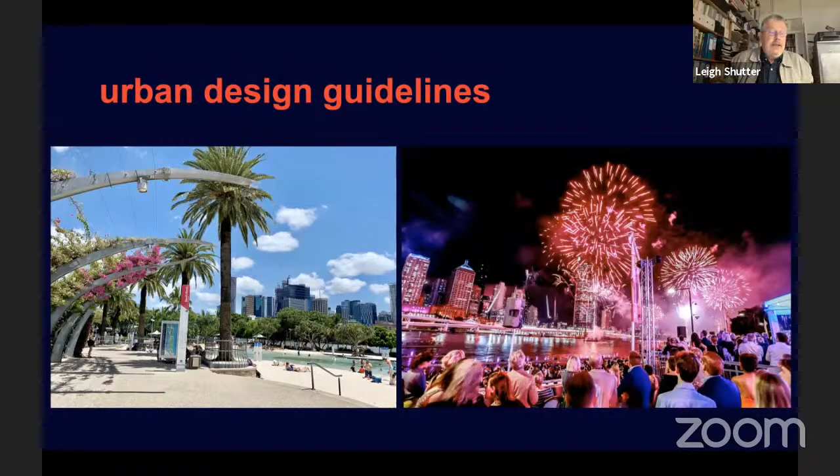So in Australia, we only have guidelines for urban design. They're not mandatory. They're simply ways that people might start to contemplate urban design. There's a range of guidelines we have: national guidelines, and state guidelines, and we can look at these in a little more detail.

I won't dwell on these too long, but Australian government agencies come together, and the Australian government, through its various bodies and institutions, has an overall guideline about the quality of our environment called Creating Places for People. This is quite an old document now, related to infrastructure needs, created by these government agencies and departments. In addition, each state typically has its own set of urban design guidelines.

They're all quite similar in a way, though of different ages, and primarily they're about the values that are important to us in our built environment.

As well as state by state, there are also non-government bodies, national institutions, foundations, alliances and councils that have various guidelines for urban design in Australia. The Planning Institute of Australia, in conjunction with the Australian Local Government Association and other bodies, has created Healthy Spaces and Places. The Heart Foundation has a guideline on creating healthy neighbourhoods, and the Council of Australian Governments has criteria for capital cities in terms of its guidelines.

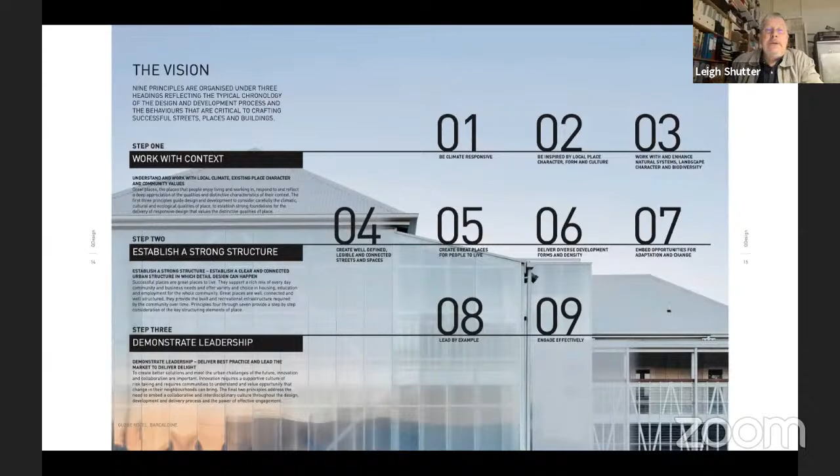Finally, in the last of the vision areas, to demonstrate leadership, lead by example and engage effectively. One of the really important things with a lot of our public design these days is engaging with the community, getting a community response and community input to projects. The last of these shows how one of these types of vision elements is illustrated.

This was vision element number 3, about working with and enhancing natural systems, landscape character and biodiversity. That in itself breaks down into a series of ways you might achieve that — number 1 on the right-hand side is working with established ecological and hydrological systems, and so on. This is fairly typical of the type of guidelines you'll find across Australia.

In Queensland particularly, there's a really strong focus on exterior environments because of the nature of our benign climate and response to climate. So physical context is incredibly important in our vision statements, at least, though that isn't necessarily always reflected in the design outcomes. This is where the issue between design policy and design vision come into conflict, with the potential to actually realise the outcomes you desire — and looking at the players involved, the financing, and the political framework has a real impact on this issue.

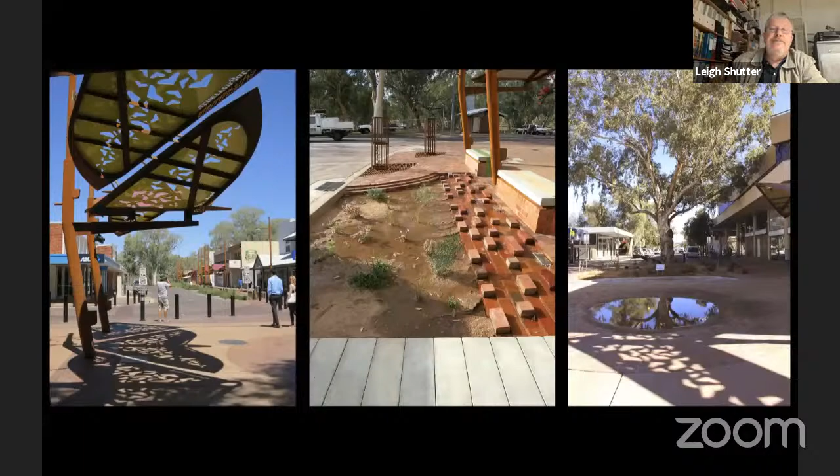And these are detailed elements from those moth shade structures you can see here. You can see the structures have different qualities in different locations. They have seating underneath and a variety of elements like that. This was at the opening of the new mall.

On the right, in addition to the shade structures and new paving, patterns, and landscaping through the area, there was new seating. The seating in the foreground is shaped like a caterpillar laid down on its side, crawling along the ground. There's a really nice element too. Here's another view of the shade structures through the mall area.

I think that's a really great example of where identity has been considered and successfully integrated into an element of urban design in a significant public space in the city. In the case of Alice Springs in particular, there's a very large Indigenous community, so being able to engage with and represent that community through these new public urban design works is an extraordinary result.

This second project is in Perth, designed by a national firm, Lyons, and a local Western Australian practice of architects, Iredale Pedersen Hook, with the landscape component contributed by Aspect Studios. I've got a video here that runs about 4 minutes talking about the development and nature of this project.

Yagan Square really connects the city and brings together the many elements of WA with the stone and the concrete, all the while respecting that Indigenous culture. What's really beautiful about this project is the narrative of the local Aboriginal people, an Indigenous story, interwoven and interconnected into the site in a way that is very distinct and very apparent.

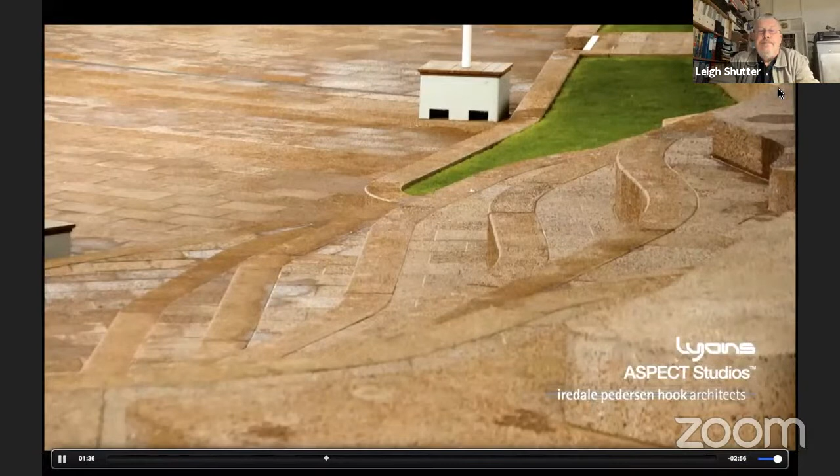This space has to operate at the larger civic scale, so we have large scale performances in this area. This can hold up to 2,000 people for large events and performances. But what's important is that it works at that scale, but it also works at the more intimate scale, so you get these little quieter moments throughout the project as well.

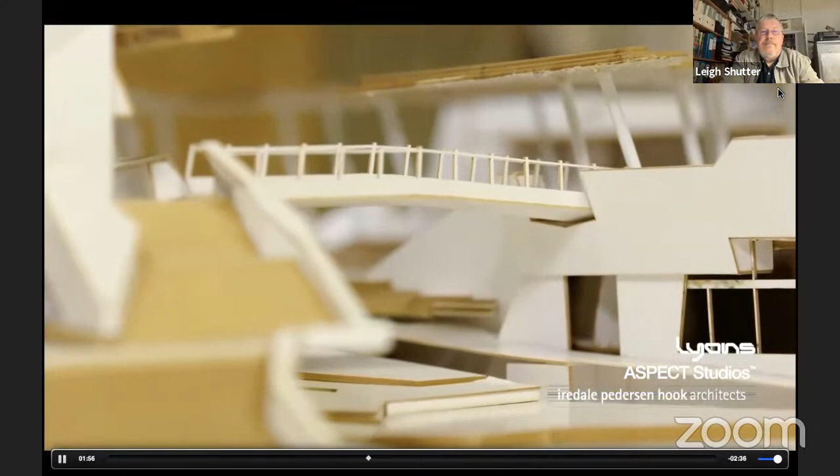We set out to design a really unique bit of landscape and architecture, and part of that started with taking all of those people that are thriving and now have access through between Northbridge and the city and from the rail, and trying to bring them into the middle of Yagan Square. So we talked about it as a heart.

A really important part of our design process was a collaboration between Lyons, Iredale Pedersen Hook and Aspect Studios, and that idea of an integrated landscape, art and architecture is really what makes Yagan Square so vital. I think a key part of that was the way we were working with the Whadjuk working group around understanding the complexities we could actually bring to this place.

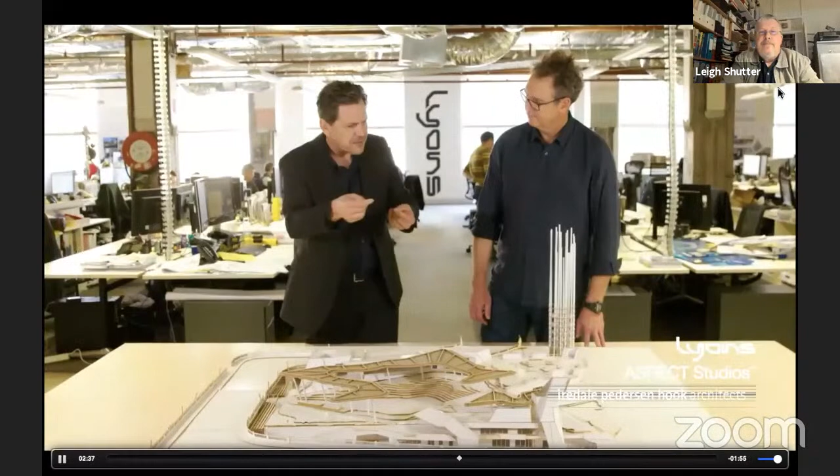It's about bringing these elements together in this constellation of pieces that sit in this place and start to make it what it is. I think as part of that, the integration of the art piece by local artist Jon Tarry really talks about a passage of water from this higher area, and it comes down the pathway, it reappears again, and then comes bubbling up here down the bottom.

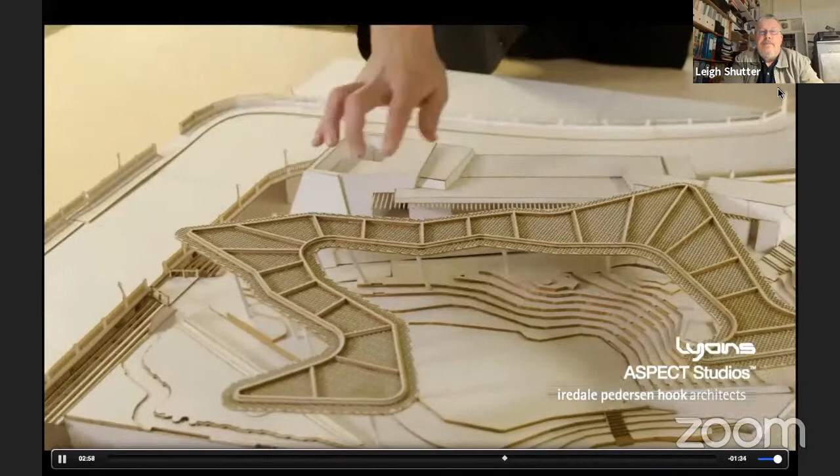The water source has been a big part of the Yagan Square story, and the importance of water to this particular area, knowing it was the wetlands many years ago before the development all happened in Perth. The canopy above us has a shape of the lake when you see the old map, so it's a big part of telling that story of this is what this place was.

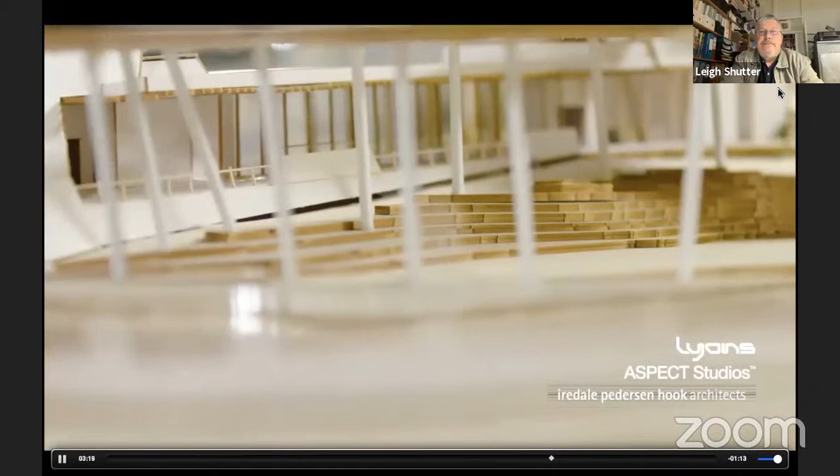The digital tower at the back replicates the reeds that are in the water. There were 14 of them that acknowledge the 14 Noongar clans inside of the Greater Noongar Nation.

Bringing that story back to be a pivotal part of Perth is really important. It's a pretty special place. I know when I brought my grandkids up here, they just loved it. My grandson's 5 and he goes, 'Nan, this is the most amazing place.' There's nothing like this that tells this story in our space, and Perth's been really fantastic to have this here, which is really a big part of we are here, you know, as Aboriginal people.

This is our country, acknowledging that through major development today. On the opening of this process, and the people involved said, 'Carol, they listened to us.'

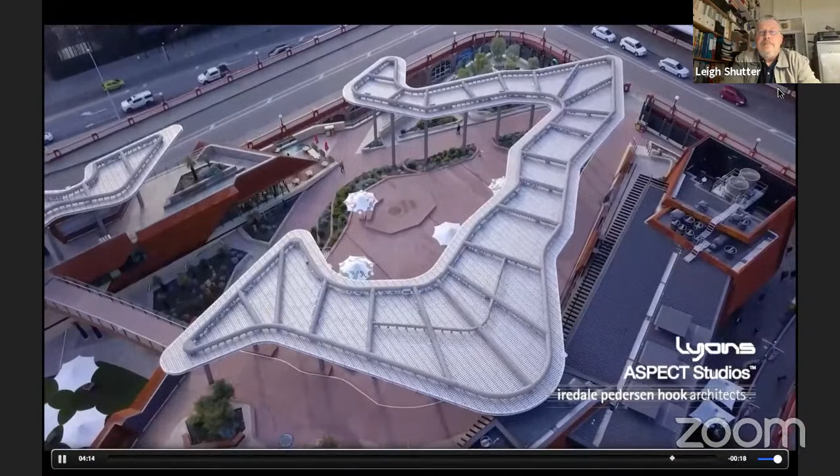Yes, this project is about establishing a new connection to the city and, of course, the remarkable technical feat to build this landscape on top of the 4 rail lines that stand below us. But what really stands out for me is the sincere collaborative process that the designers have introduced, working with the

Aboriginal people of this area to really bring their stories to life. So, I mean, there's a range of the designers there talking about the conceptual ideas for this place in Perth and the various people that contributed to it.

So if we look a little bit more carefully, you can start to see here how this zone sat in relation to the city. So on the right-hand side is the commercial heart of Perth, a city of about 1 million people. And on the left-hand side is the cultural precinct. And beyond that, though you can't see it, is a lake area.

But running through the middle where Yagan Square is, which is in the foreground here, is the main train line, the main access to the city. So the large rectangular building sitting immediately behind Yagan Square is Perth's Central Railway Station.

And one of the key important aspects was to be able to make, as they talked about in the video, this connection from the commercial to the cultural precinct. And that primarily happens down in the bottom. There's a continuous pedestrian plaza that runs from left to right, right to left, across the bottom of the square precinct. And in addition, there's new vehicular access to the train station.

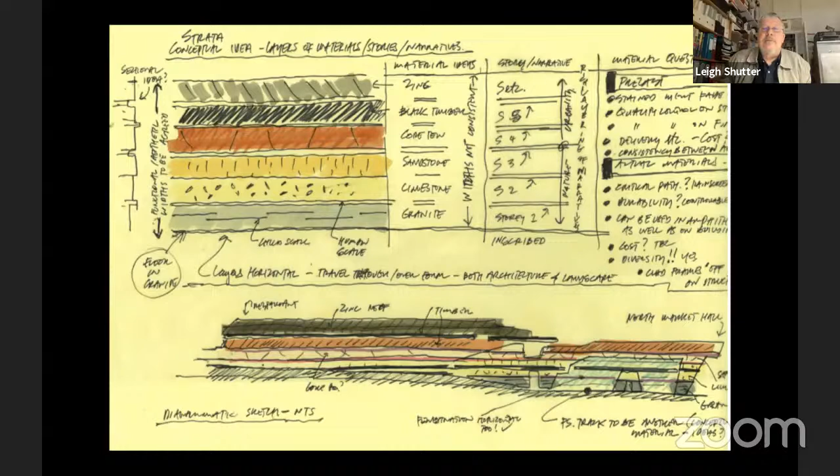Now, first of all, another one of the things that the designers looked at was the geomorphology of this place and these different layers and how they might be represented through different materials. And you can see that in this type of elevation, working up through the strata of the site.

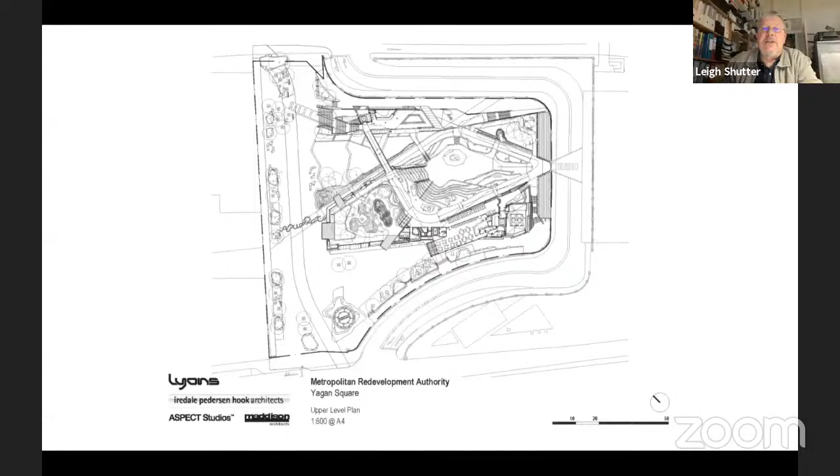primarily through all these things, making a connection over the train line which runs underneath. So the train station on the right here, you can see the vehicular access up to the train station, the primary elements in the square, and the pedestrian connection on the left-hand side from top to bottom, bottom to top, connecting those precincts over the top of

the train line. And as they said in the video, the shape of the canopy is in fact the shape of the original billabong, original lake that existed before this area was developed. There's some records of the original landscape and topography, and other elements also reflect those sorts of qualities.

Here in the bottom left, you can see the tower, which, as was said in the video, is made up of 14 vertical elements that metaphorically represent reeds in the water, but represent each of the Aboriginal communities that used and occupied this land historically.

So this is from the pedestrian walkway looking up through the square to the train station, which you can see sort of below the bridge across this end of the square.

Another view from that end of the square through the pedestrian link.

Looking at the canopy and water features, the canopy covers an outdoor performance space.

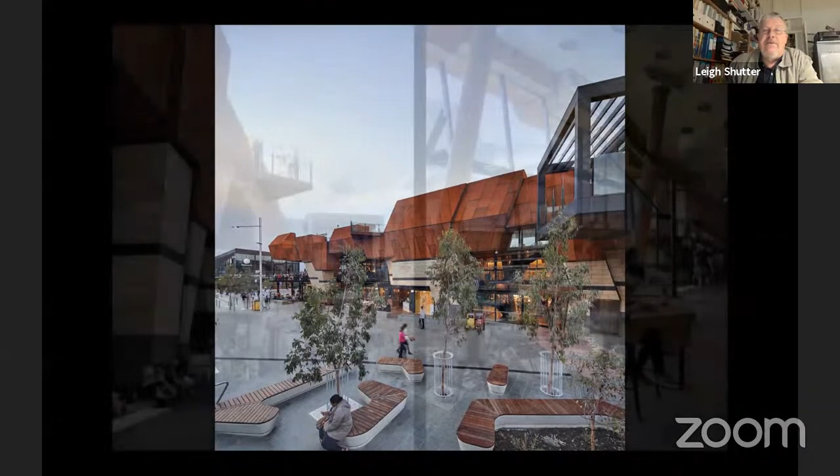Other views of the square, the vegetation still young. This is a fairly new project in Perth, with recreation, cafes and so on.

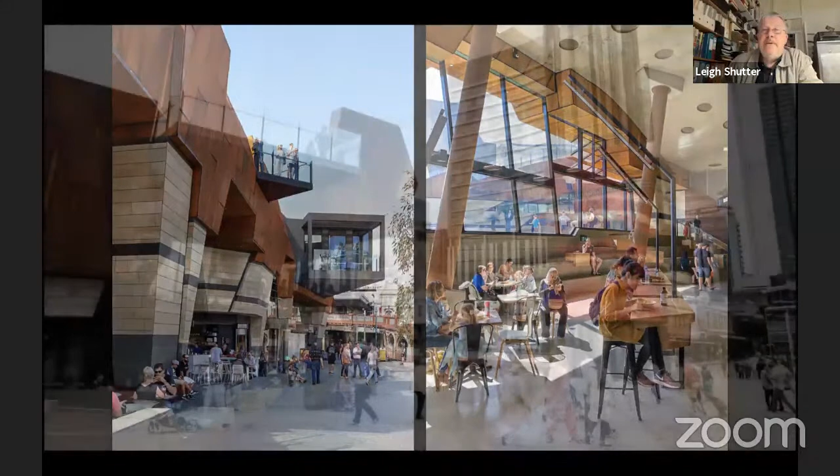On the right-hand side here is the lighting tower and the communication tower, the media tower with 14 reeds and the capacity to be lit and shown in different ways. One of the really interesting aspects of the space is this focus on lighting, using it as a sort of art and media piece in itself.

These are some views of the canopy over the amphitheatre space. I have another short video that looks at the concept and development of the lighting design, and shows the lighting design itself.

Just some last views of this water feature that runs through the site. These shallow ponds at the top of the site have water that runs down through the site to a lower area that kids can play in, but it also provides a respite from the surrounding traffic, with the sound of running water and so on.

I think both these projects, the Alice Springs Mall project and the Yagan Square project, are really two terrific projects where, in Australia, we're starting to respond to and recognise and engage with Indigenous culture, which has been very long overdue, not recognising the first Australians, not being respectful and attributing to them their rights and acknowledging the importance of their culture and how it can contribute to a contemporary circumstance and culture.

So on the one hand, I'm very encouraged by our changing attitude about identity, our changing circumstance in relation to Indigenous people and Indigenous culture. I think these are great examples.

Why these have been achieved, I think, is primarily because in these two circumstances, government has accepted its responsibilities in relation to design and policy. In both cases there has largely been an alignment between the vision, urban design policies and the outcomes. These things have been carried through successfully, and commercial interests or other narrower interests haven't prevailed.

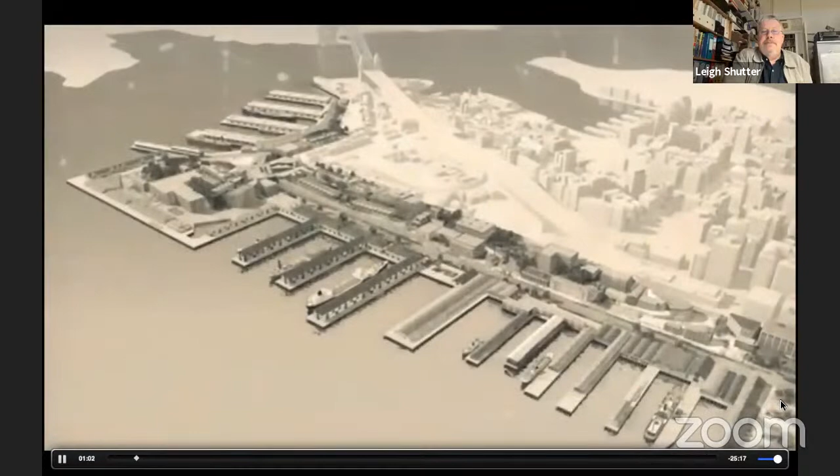I felt there was a once-in-two-century opportunity to take the former maritime industrial lands and link them up into, again, a recognisable group of headlands. The opportunity to turn this back into a living, vibrant, dynamic part of the city was something that couldn't be missed. There's nothing quite like it that's been done in Australia previously. Some of the international experts who've come here do say this is the number one urban renewal opportunity internationally. Almost a world first and a world only opportunity, and it is something you really want to take advantage of.

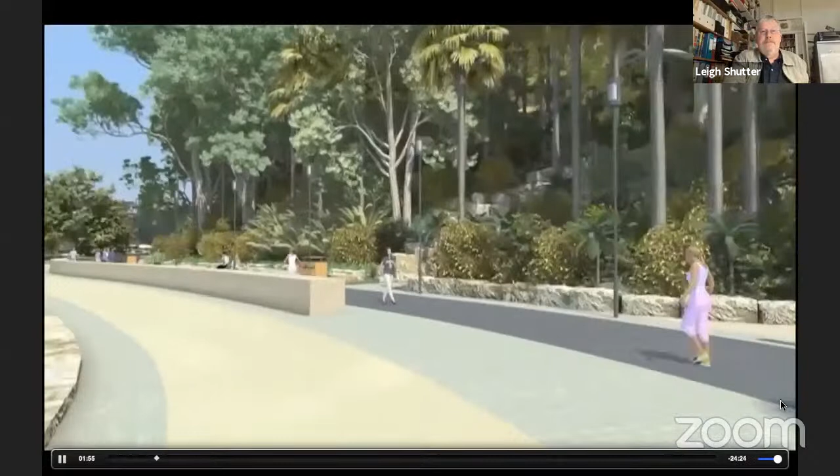This is the story of one of the most ambitious urban renewal projects in Australian history, transforming a 22-hectare former container port into a vital new dimension of this global city.

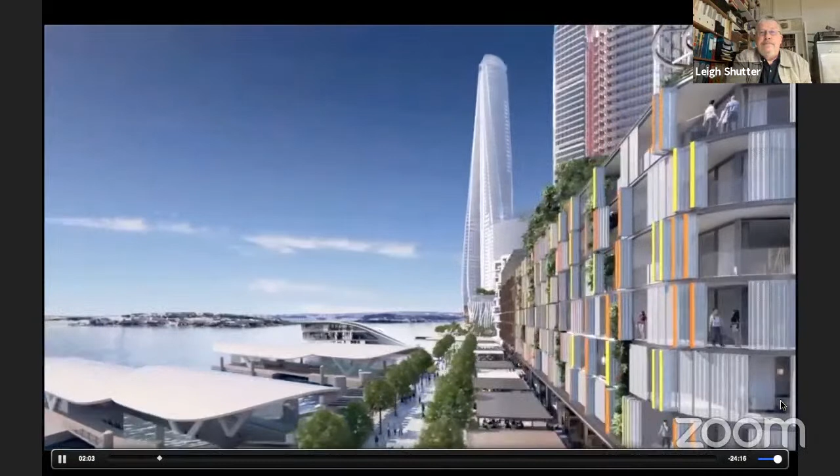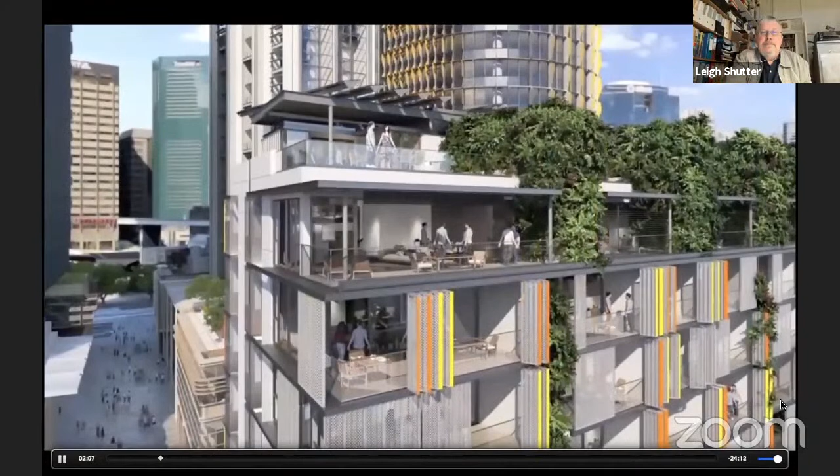Whenever you're trying to do something major in a city, it's controversial. It is a very unique site that provides a once-in-a-generation opportunity for the city, and it is one of those where politics should be put aside. If you're doing something as big and bold and strong as what we're doing here, if you didn't upset some people, we would have failed. A site like this, its development, you get one shot, you've got 200-year life minimum, you need to get it right.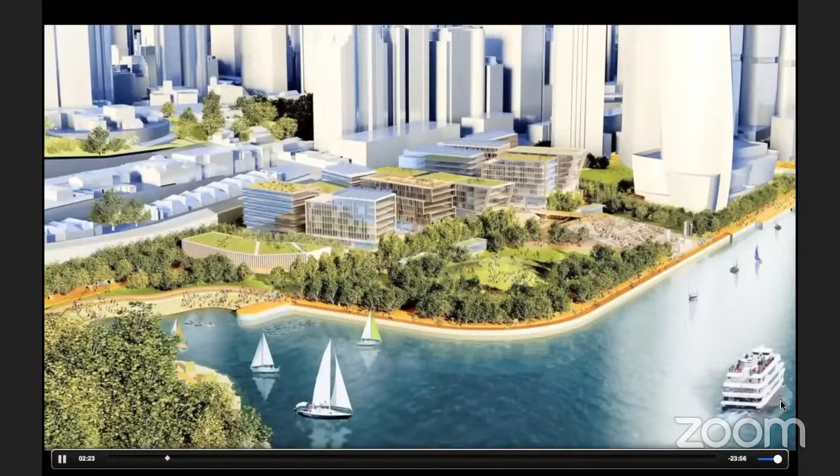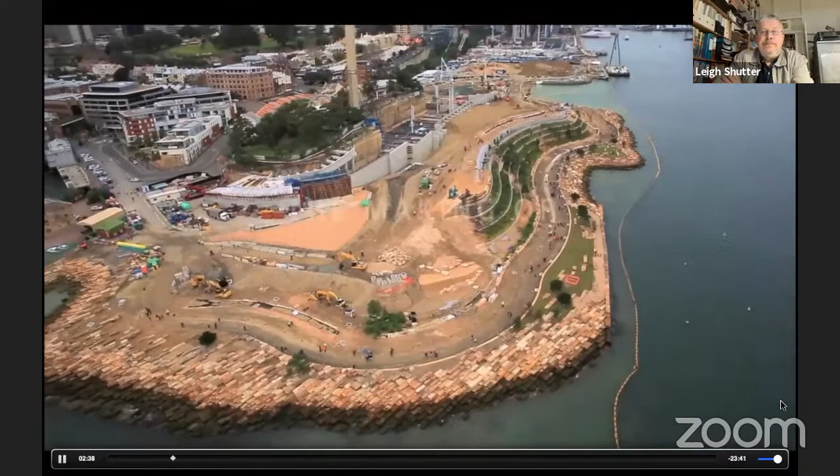Rich in history, the harbour has been home to the Indigenous people of Sydney for many thousands of years. Located on the traditional lands of the Gadigal people, the Barangaroo precinct is named after a powerful Aboriginal woman. She was a fisherwoman, but she was also an elder by the time that she married Bennelong. And she was very highly regarded and highly respected by the people, so they would look up to her.

Before European settlement, a great body of Aboriginal people here lived in the more intimate part of the harbour, where the headlands were closer. Barangaroo and Bennelong owned Goat Island. Aboriginal people would canoe between the islands because it was only half a kilometre to Ballast Point, to Balmain, to McMahon's Point, to Ball's Head and to Barangaroo.

I think Captain Arthur Phillip might have thought that she was going to be a bit of a pushover, but there was no way in the world that Barangaroo was going to be a pushover for anybody. There is a story where Bennelong was invited to go to Government House, and while Bennelong was the dandy, if you like, and dressed up in the English fineries, she just refused to wear clothes and she went along. She wanted to continue her culture, Aboriginal Gadigal culture. She wasn't going to be swayed to take on the new European culture at all.

As the landing point for the first European settlers, Sydney became a working port and hub of industry and the centre of the national economy.

With the waterfront stretching 1.4 kilometres along the harbour foreshore, right on the western fringe of the Sydney CBD, the site represented an historic opportunity for transformation.

The Premier of the state at the time, Bob Carr, made a decision that the stevedoring operations here was ending its lease period and was moving to Botany, and it was time really to look at the reuse of the site. First step was to at least alert the government and the cabinet that there was a better idea than simply handing it over to some foreshore authority to sell the land. Maybe the city deserved something better.

So I approached Premier Bob Carr about 2004. The cabinet had, and the bureaucracy had no idea really what the scheme would be or how it would unfold, but simply that the cabinet had agreed that half of it would be open space. 50% for urban development that was part of the city, 50% for open space, public spaces, green areas, parklands.

What the government did is announce that they were going to have a global search for ideas for this site. A competition was arranged with the world's best architects and designers, an open, anonymous competition. I was appointed chairman of the jury, and we had a mix of people representing community groups, business, and broader international design initiatives.

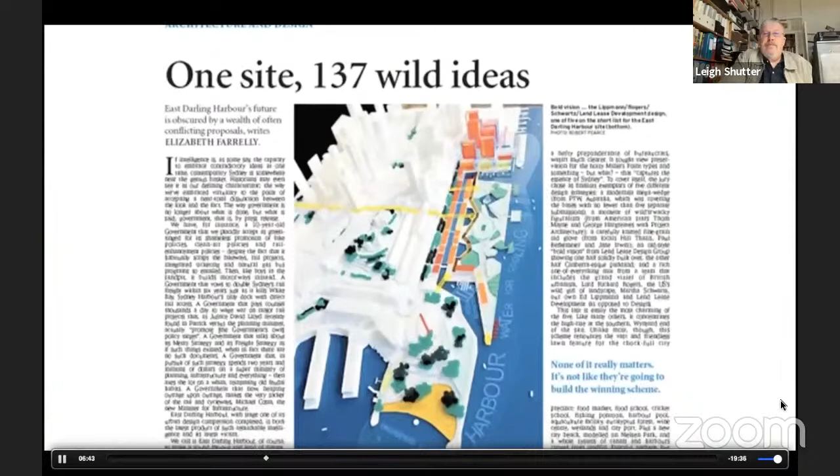We had some 137 entries and narrowed them down to 50, then to 20, and ultimately to 5. The value of this was it presented the community and the government with 5 fundamentally different ways the site could be developed.

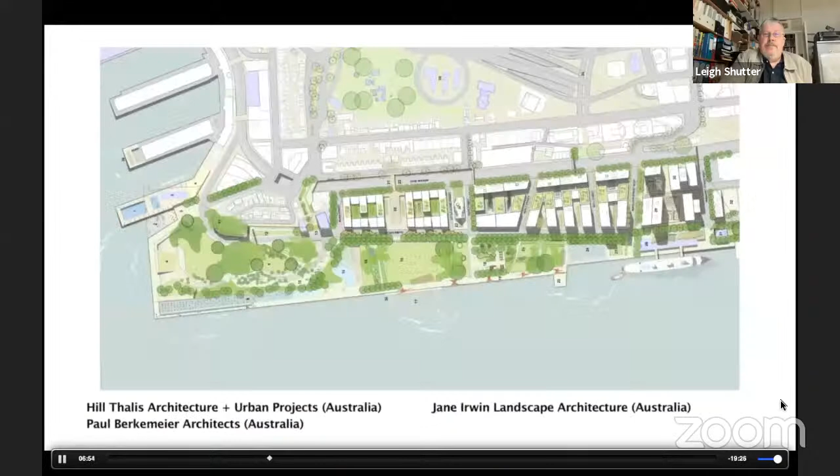The site as a container terminal had a long, straight, one kilometre long concrete slab, almost like the third runway at Sydney Airport. Some jury members thought it was very important to change that, so we moved toward the more organic flow of Sydney Harbour with bays and headlands. Others thought we must keep this bit of heritage—I didn't see it as heritage—but keep the big concrete slab and treat it as part of the city, building on top of it.

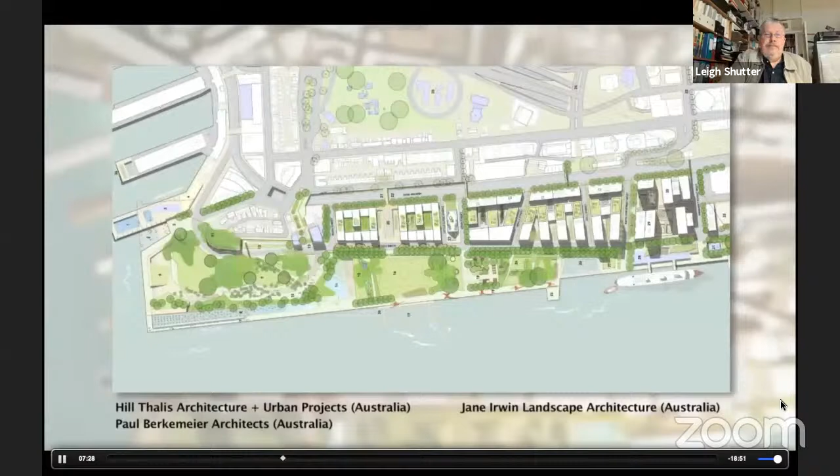We ended up choosing a winner, but we put some conditions on that winner, which basically said we didn't want the straight line. We wanted some bays, a headland park, a hill that was really more symbolic of Sydney Harbour itself.

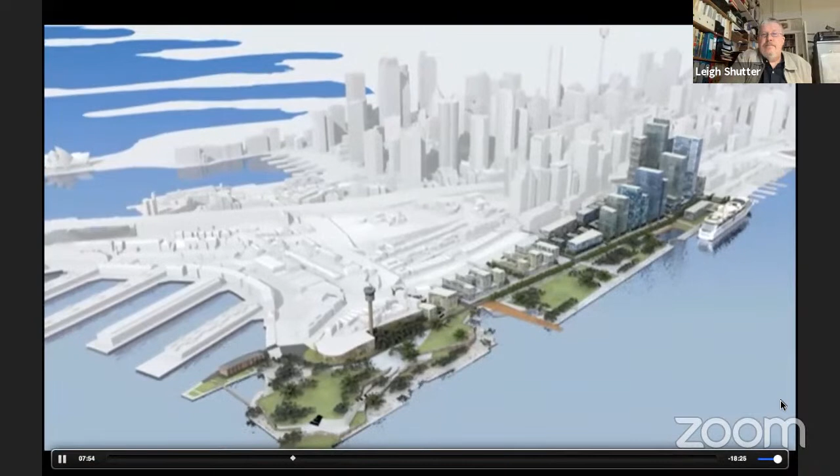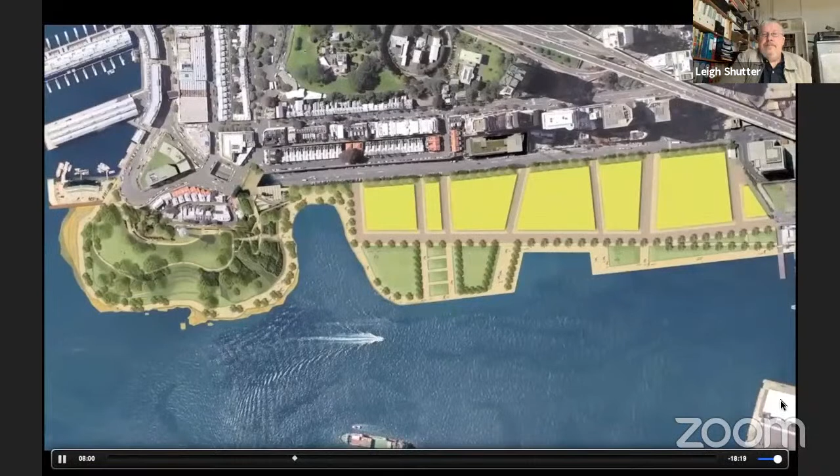The preferred ideas and concepts from the competition evolved into a plan submitted to the New South Wales Government in 2007. The plan divided the site into 3 distinct areas. I think segmenting the site into South Barangaroo, Central Barangaroo and the Northern Headland was a smart move, giving us a new financial centre in Barangaroo South and a wonderful natural space just north.

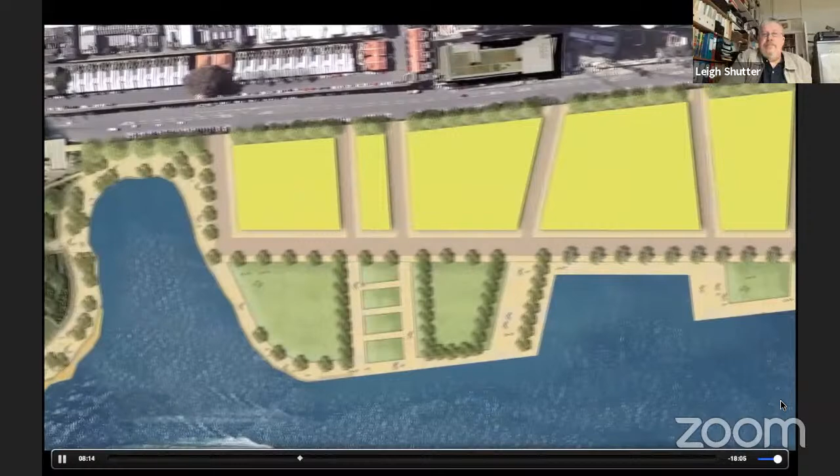Following an approved concept plan, the search began for a company to design and develop the commercial precinct at Barangaroo South. A selection process produced 2 clear contenders: Brookfield Multiplex and Lend Lease.

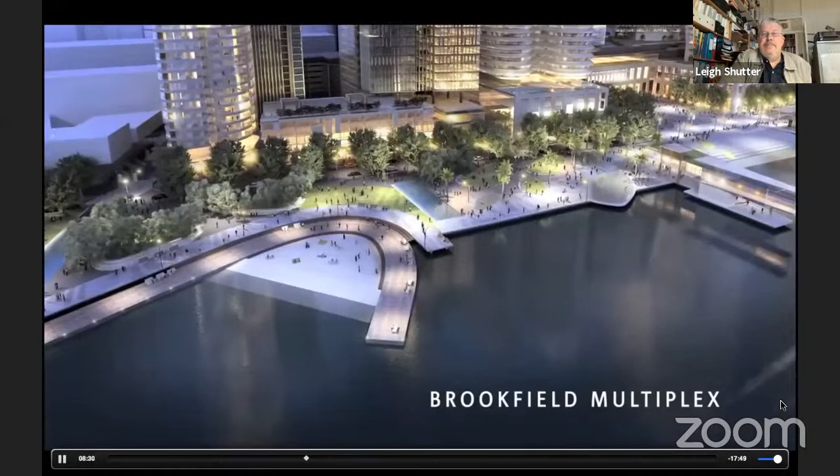You don't get too many projects this scale, and while you might have the rights to build it, you've still got to secure tenants. There aren't many projects that change the skyline. Barangaroo will change the skyline of Sydney, so it's hugely significant.

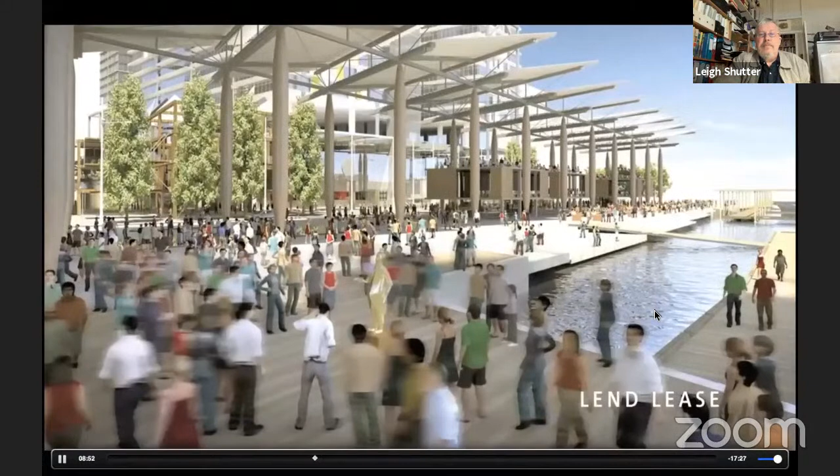One of the criteria was sustainability, and we actually challenged the developers to create a climate positive outcome for all of Barangaroo. There was a final assessment, and the winning proposal was contracted and agreed with Lend Lease.

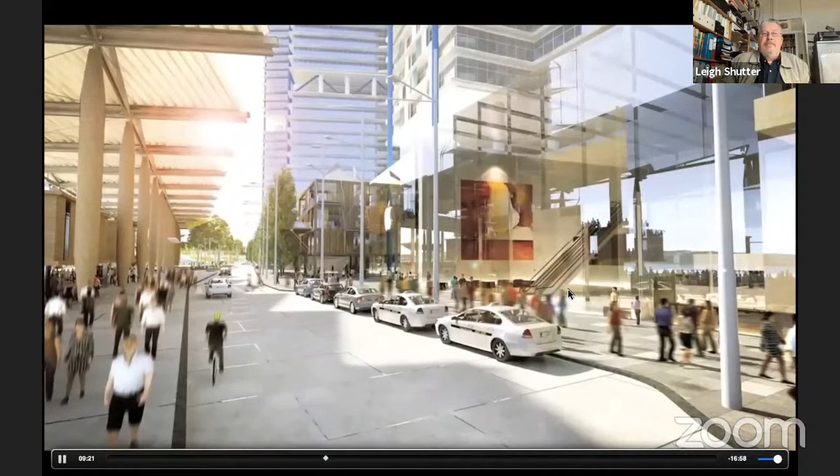I think as an urban regeneration project, it's pretty perfect, to be honest. It's got an economic engine room at the south, highly sustainable, globally significant, making a statement for Sydney. But that is also helping pay for a fabulous public space for the ratepayers of New South Wales. So to me, it's the best of both worlds.

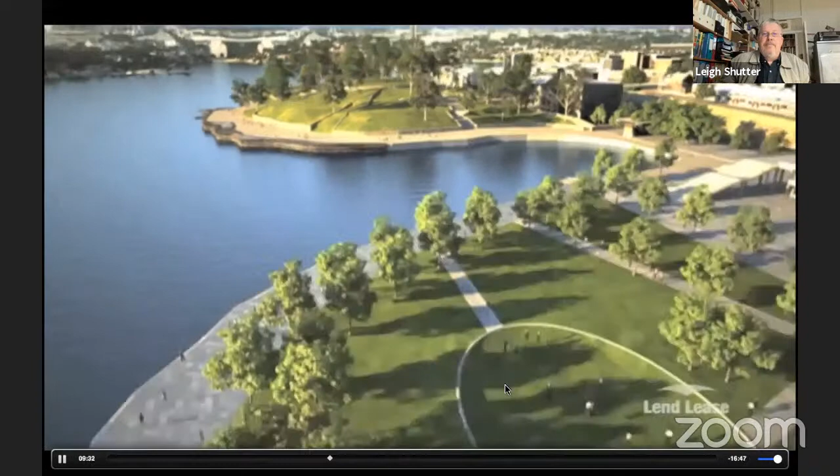The approved concept plan and subsequent development proposal contained elements that not everyone was happy with. What's happened here is a corporatisation of public land. The City Council felt a little strange because the government was running this, not the council, and that led to tension over whether it would be better if the council ran it instead.

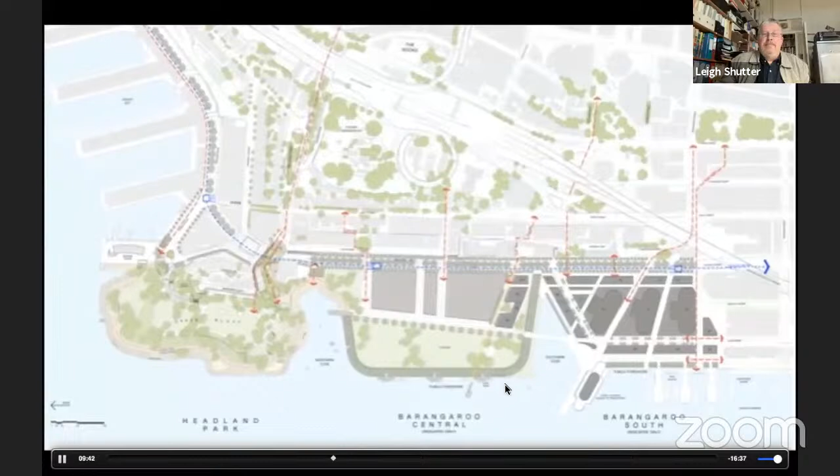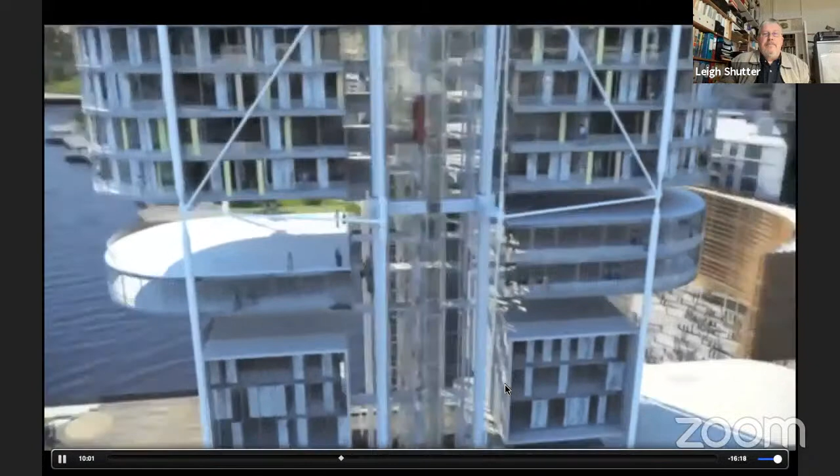There was a controversy around the hotel positioned over the water. The original Lend Lease proposal to government was for a hotel on a pier on the harbour. All the assessors said, look, that's stunning, that's something special, we should do that. But it was also important to a lot of people who felt it was incorrect, it was wrong, and that edge shouldn't be broken by a hotel pushing out into the harbour.

I don't believe the original tender should have included part of the harbour, and I want to see that hotel move back onto land. Then the negotiations began with Lend Lease.

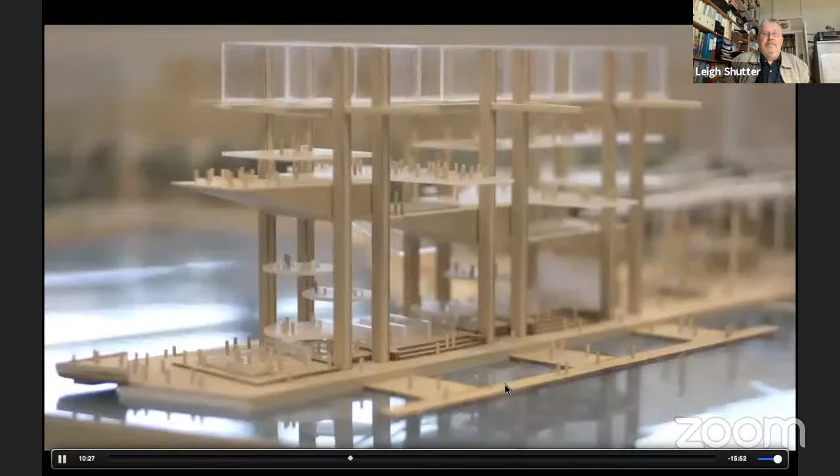The massive Barangaroo project on Sydney's waterfront has been scaled back. After months of criticism and controversy, Lend Lease, the company in charge of the project, has made some big changes. We've managed to maintain the same open space area on the project whilst bringing the hotel off the water and placing it on shore.

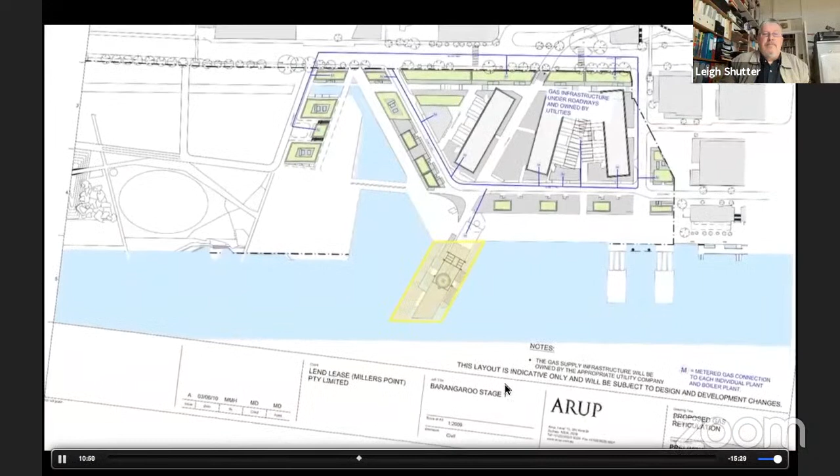Major criticisms we've had about the relocation of the hotel concern the loss of public space, and often that criticism is not founded in knowledge of the reality of what's being delivered. The fact that there was a site dedicated to a hotel came together with a proposal separately lodged with the government by Crown for...

This has been a huge project in Sydney, with some really interesting aspects to it. This is a plan of the site as it more or less exists today. On the left-hand side is the public parkland, the organically shaped and edged hill. One of the really interesting things about this project was what effectively happened at the left-hand end of the site: recreating the original headland.

Interestingly, this new headland hill is made from sandstone from Sydney, but it's a hill that is hollow. There's a huge space underneath it that still isn't really occupied, used as car parking space at the moment. But interestingly, none of the competition proposals, and indeed at least initially in the subsequent design, ever proposed returning this piece of the site to appear the same as the original headland.

That whole movement was championed very much by the previous Prime Minister, Paul Keating, who appeared in the video, and he was the strongest, and in the end a successful, advocate for making this part of the site return to appear as it did as a headland before settlement in Australia. In retrospect, I think this is a sort of intervention that's been really positive. This is a fantastic piece of the site, a really delightful park, and despite its artificial recreation of a natural place, it really is incredibly successful.

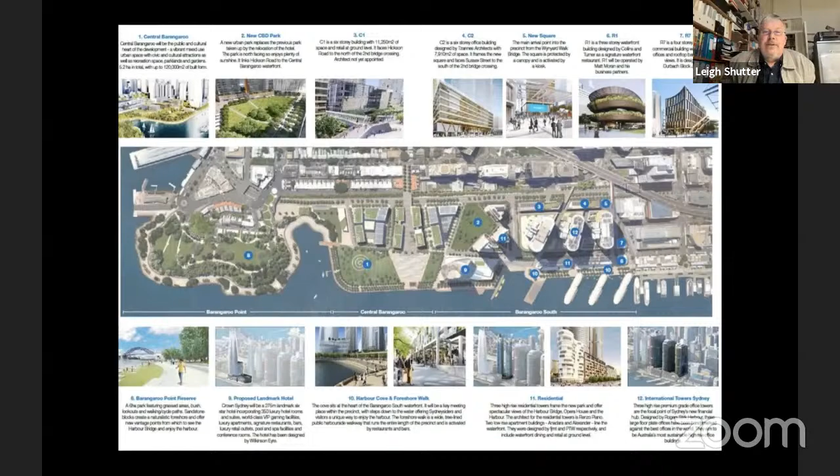This is the site as developed now. The southern part of the site with the three towers and the hotel has really been developed a lot more than was originally envisaged. The original competition schemes, and indeed the original proposals from Lend Lease, had a much lower level of development.

The existing city, the central city area, still had views out across the harbour rather than being screened from the view from the site. The site has been able to largely maintain the 50% public place, but in this particular circumstance we have ended up with this—some regard it as a beautiful sculptural building, but a casino and private residences that sit on the site and have become a new icon for Sydney. So I think there's some question about the nature and qualities of this building, and how we might want to represent Australia and Sydney in particular in this city.

Other views of the site show this extraordinarily scaled building. So in this case there has been a very significant contest between private interest and public interest, between commercial interests and perhaps the greater good of the broader community.

The last project that I want to look at is, in a sense, a similar type of project taking place in Queensland. I'm just returning very briefly to the Queensland Urban Design Guidelines, talking about people, experience, place, lifestyle—this set of vision statements, including thinking about natural systems, landscape character and biodiversity. These are very central to the design guidelines, this notion of a connection to the external environment, responding to context and climate. This last project is called the Queen's Wharf Project.

So I have another, and this is the last of them, short video that explains this project. In this view, they've taken the freeway out, though the freeway will actually still exist, so it's running over the top of these spaces.

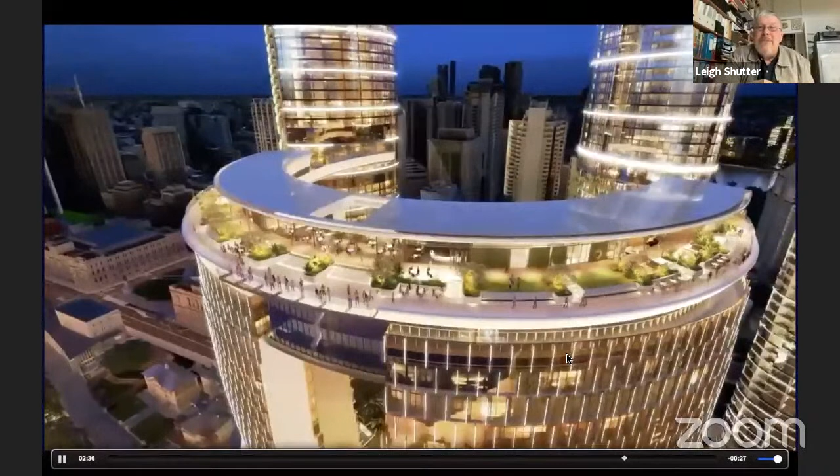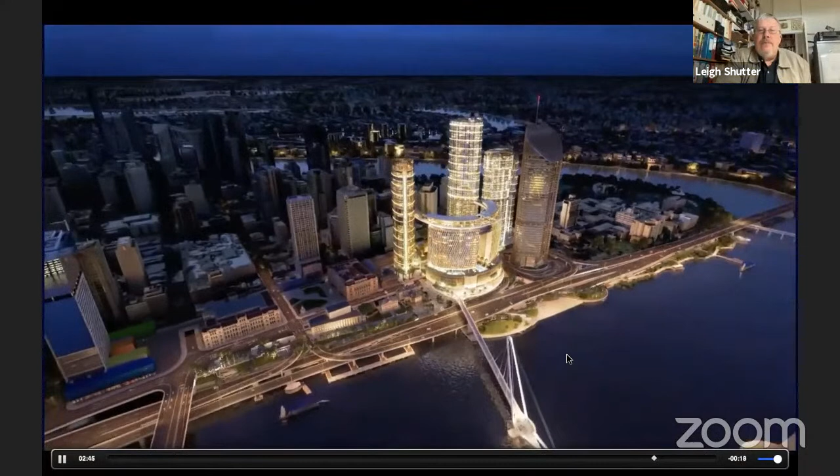So that is Brisbane's latest piece of urban design. That project is well underway in terms of its construction, and the completion date is anticipated at the end of, I think, halfway through 2023. So there's still a couple of years to go in terms of the construction for that project, but it's well out of the ground.

They've started and they're well underway with the new pedestrian bridge connecting the precinct to the cultural centre on the South Bank side of the river. And it's a major project. I think the construction cost is $4.5 billion Australian dollars. So it's an enormous project, and it's going to have an enormous impact on the city.

And it raises, I think, really significant questions, not perhaps about the physical form of the building, though maybe about the physical form, but really significant questions about its relationship to the set of values and criteria that form part of the QDesign document. How it really relates to the outdoor lifestyle that we talk about here, and the climatic response that is part of that QDesign document.

So look, I'd like to just finish by returning to these sort of questions and ideas that I raised at the beginning, that the city is where we create and manifest our community identity. It is where our collective soul is revealed, and we really need to be vigilant in our contemplation of identity and how we realise that identity in the process, and trying to ensure that our vision and our identity are really realised through our efforts to build our city and create new urban design environments.